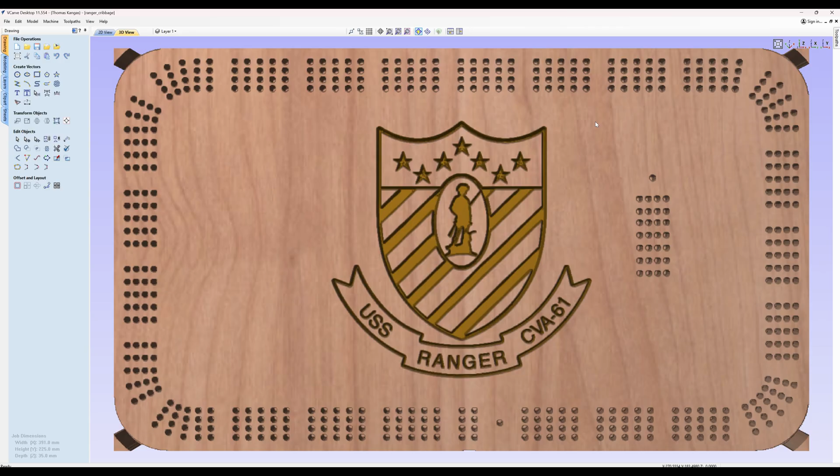For our project, we're going to start by creating a new file, and for the size plug that I already have cut for this, I have a width of 391 millimeters, a height of 225 millimeters, and a thickness of 35 millimeters. I always like to go from the lower left-hand corner, and I set my material to cherry because cherry is the wood that we're going to be using today. So we'll start that off.

Next, we're going to import our vector, and I've already pre-designed this vector and made sure that it's cuttable on my CNC. If you saw my post on YouTube, you saw that I had posted a picture of the results of that. So we're going to open that up. We're going to press F9 to center that. And now we're going to start creating our vectors to determine the size of the board.

Our first vector we're going to create is going to be the size of our workspace, 391 millimeters wide by 225 millimeters high. I'm going to give it a 30 millimeter radius so that it has nice round corners. We're going to create that vector, close that off, highlight the vector, press F9 to center that.

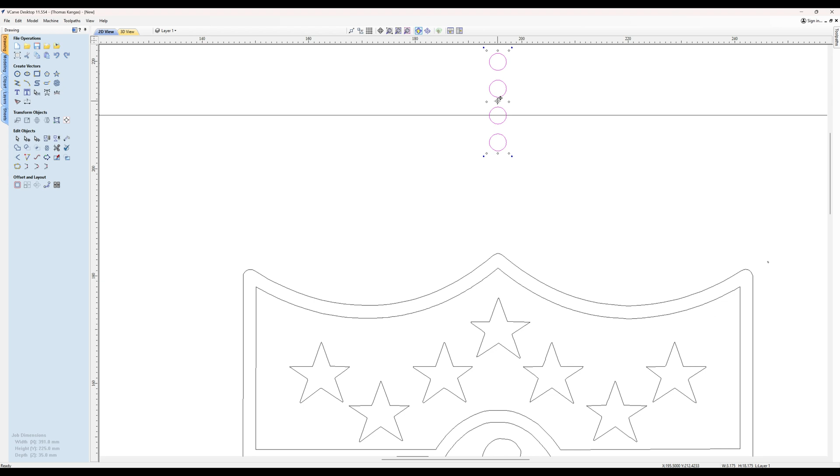Close that out. Once we're done there, we're going to highlight our 4 peg holes. We're going to come over here and group them. We need to group them so that they'll copy properly along the vector when we decide to make the holes. So now that they're grouped, I'll highlight, double click, and we want to move those to where they line up centered on that interior vector.

Okay, so now that we've got our initial set of holes laid out, we are going to highlight that interior vector along with the 4 holes. You do that by holding the shift key and clicking the interior vector. Then we're going to do copy along vectors and create 150 copies aligning the objects to the curve. Make sure you select align objects to the curve so that they go around the curves of the vector.

So we'll go ahead and say copy, and when our copy is complete we can click on close, and now we no longer need that original set of peg holes. So what we will do is we will leave those highlighted, press the delete key, and now they're gone.

The next step in the process is going to be to put a little bit of spacing between our pegs, so we have our starting position, our stop position, and can clearly identify our scoring. We usually break these up into groups of 5. Alright, so I'm going to start by deleting this group of 4 pegs under the E in Ranger. I'm going to move over 2 to the left for my start position.

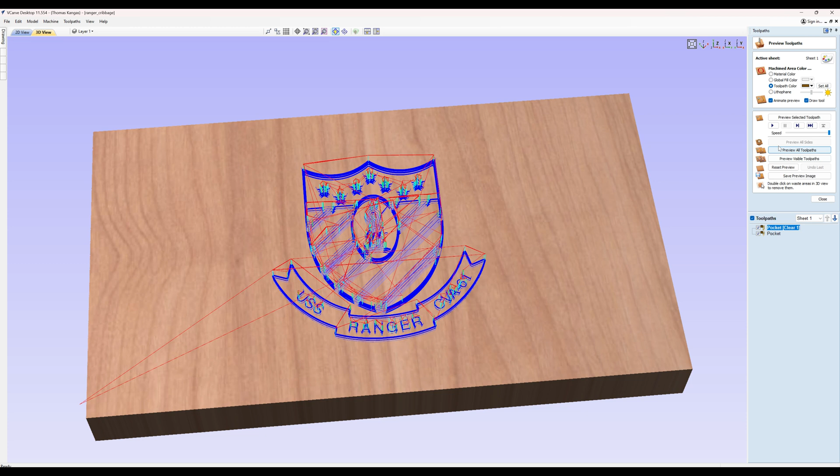I'm going to change the colors to something somewhat similar to a walnut color. Let's see if we can get something closer to a brown. And set the same color for our pocket, and we will preview the toolpaths. Alright, so there we have our pocket side of the V-Carve inlay.

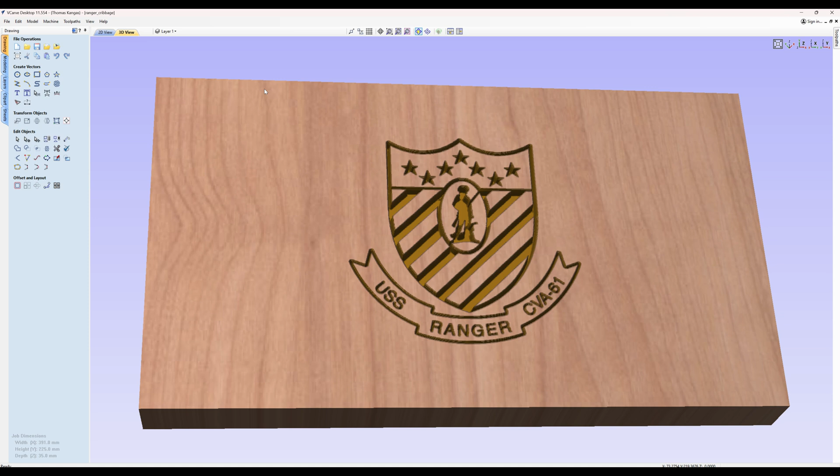Now that we've completed the pocket side of the inlay, we're going to do the plug side of our inlay. So for that, we need to switch over to sheet number 2 and then go over to our toolpaths. We're going to select everything, and we're going to do another V-Carve toolpath. Now with this, we're going to do a start depth of 7.5 and a flat depth of 1.5.

What this is going to do is give us about a 1.5 millimeter glue gap and gap above the board, which we'll be using the CNC to remove later in the process. So something to keep in mind is that with the hobby CNCs, we can't go to this depth. Looking at this toolpath, the CNC will assume that our start depth is already cleared material, and it'll plunge all the way down to 9 millimeters. We don't want to do that. So we're going to make this our third toolpath, actually.

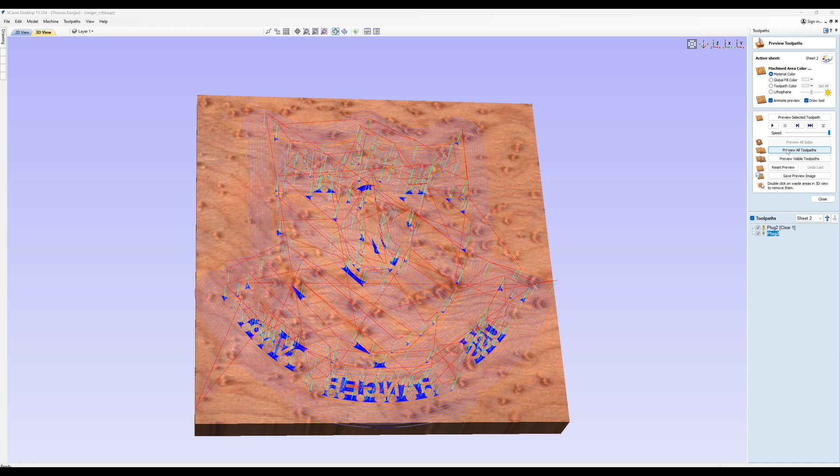So we're going to call this plug 2. And we'll calculate that all out. And then if we actually run it, that'll be our full depth. But we're not going to do that full depth on one particular toolpath because obviously we would crash our bit, probably break it, and possibly damage our CNC.

So we'll reset that preview, go back over to our 2D toolpath, close that, and now we're going to create a second toolpath called plug, and we're going to set that one at 4.5 with a flat depth of 1.5. This will give us a basic depth of about 6 millimeters. We're going to call this plug number 1. Calculate that out.

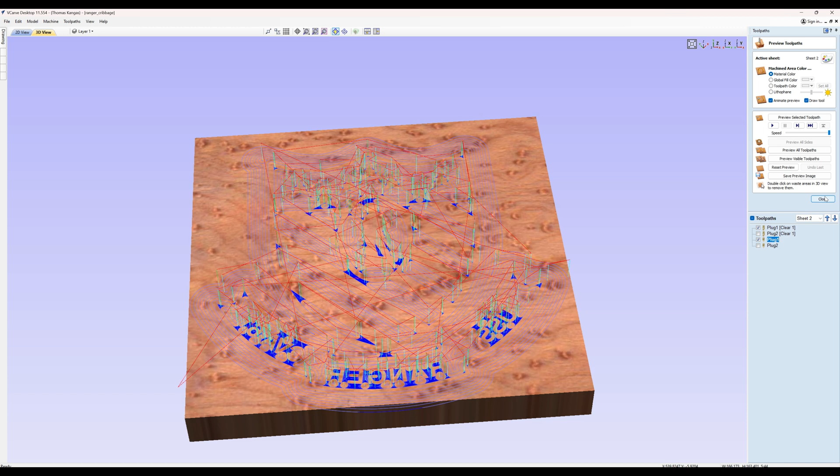And then we're going to drag it above our plug 2 settings. And we'll go ahead and close that out. And then we'll make our main plug, which is going to be starting off at 2 millimeters in depth and going down to a flat depth of 1.5. This will give us a total depth of 3.5 millimeters, and this will be our first pass.

So we're just going to call that one plug and calculate that out. Move plug up above plug 1 and plug 2.

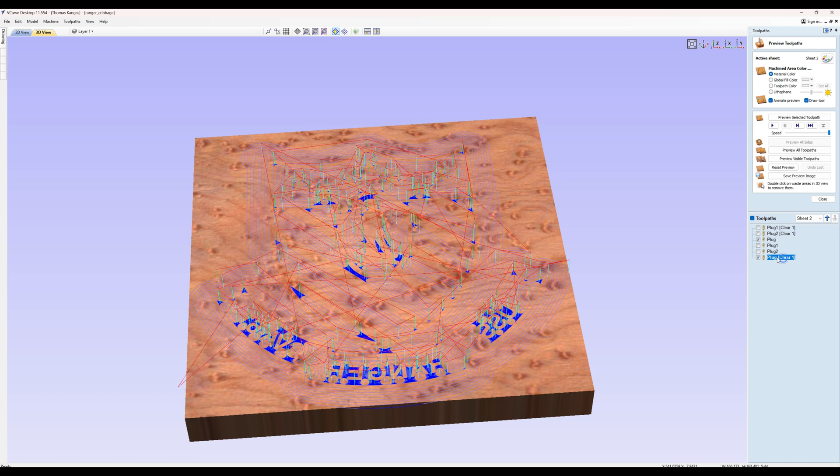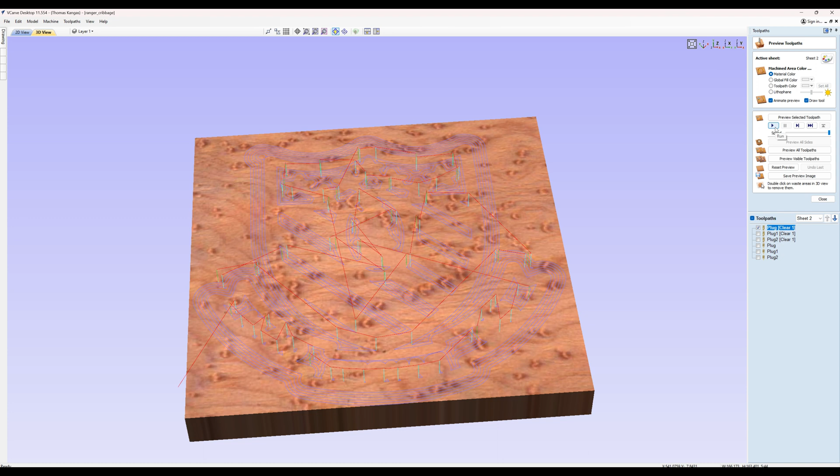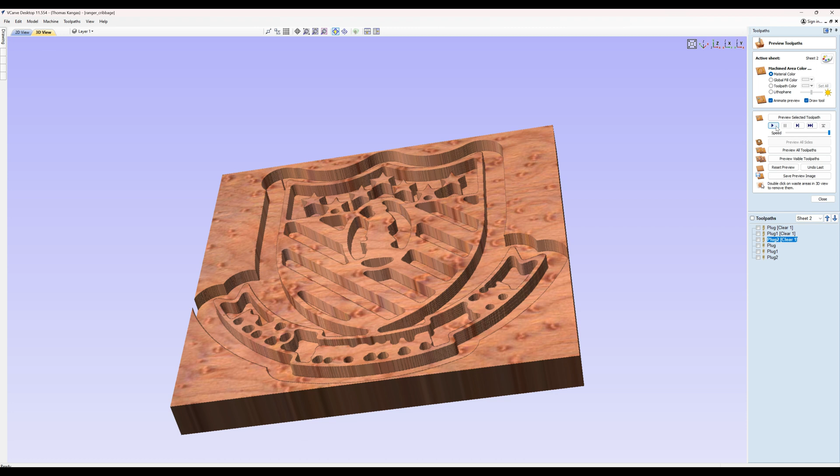And now if we do these tool paths in order, and it's important to do them in order because when we group these and export them later, they will execute in the order we have them. But we're going to start with plug clear, and you see that goes just about 3.5 millimeters in. Then if we run plug 1, it's going to take us down to our depth of 6 millimeters. Then finally plug 2 is going to take us all the way down to our 9 millimeter depth.

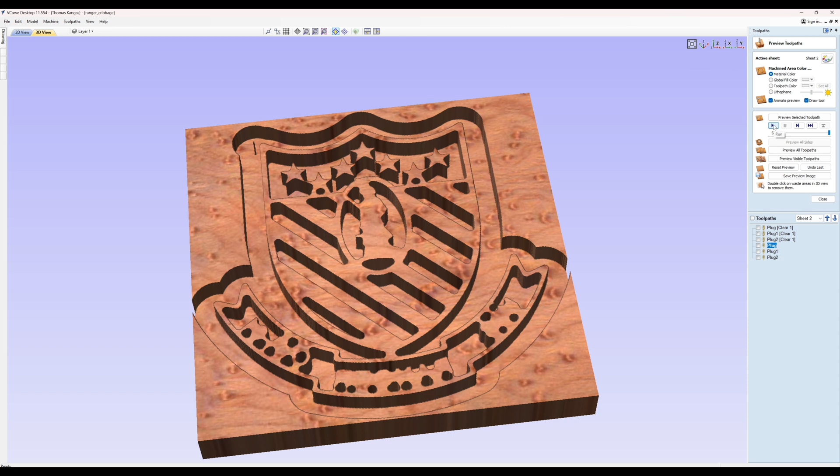Now this is just the 1/8 inch end mill at this point. After that we'll do a tool change, and we'll start with plug with our V-Carve, and as we see, it'll do a pass. Execute plug 1, takes it down, and then plug 2 will complete out our entire plug side. We will, with the bandsaw, clear off the excess material so that we can glue this up.

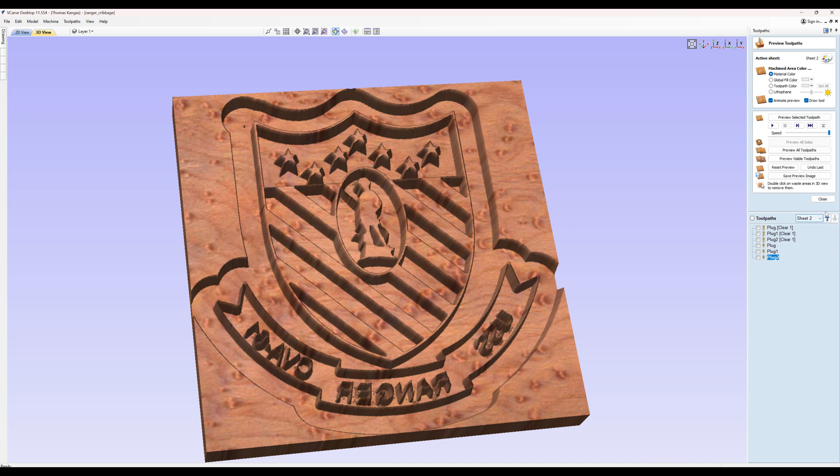So now we can go ahead and close that out. Switch back over to our file operations and our 2D toolpath, and go back to sheet number 1. Next, we're going to need to do our toolpaths for our cribbage board peg holes. So for that, we are going to use a drilling path. But we need to start by selecting all of our peg holes.

Okay, now once we've got our peg holes selected, we'll go over to our tool paths. We're going to do a drilling tool path. For the drilling tool path, we're going to go down to a cut depth of 12.7 millimeters using a 1/8 inch or a 3.175 millimeter end mill. We will use peck drilling and retract above the cutting start depth. Our retract gap will be 0 millimeters and our peck depth will be 2 millimeters.

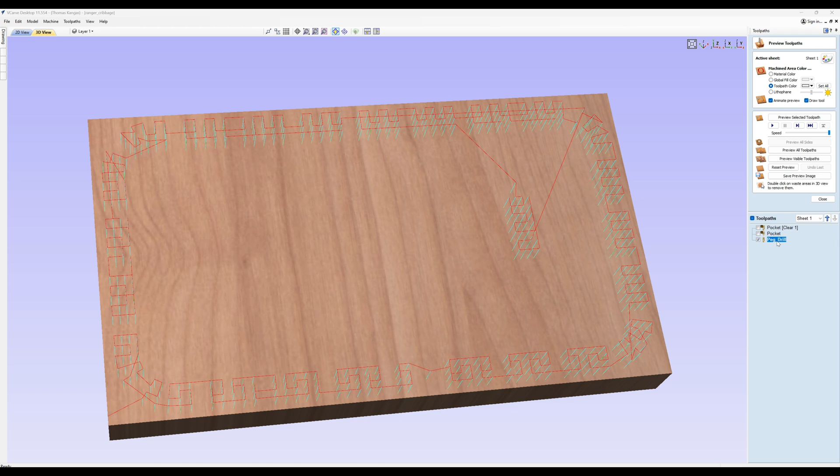Now if we select all three of our tool paths and click preview, we'll see we have our board and all of our peg holes now cut. So we'll go ahead and close the toolpath preview, move back over, switch to our 2D tab, and we have one more toolpath that we need to create right now, and that is our profile toolpath. For our profile toolpath, we're going to highlight that outside vector, and we're going to do a profile toolpath.

Now for our profile, I plan on using the bandsaw to cut around these edges. So we're going to give a path for us to follow. Instead of going the entire 35 millimeters in depth, which is difficult to do because I only have about 4 inches of play in the Z-axis to begin with, what we will do instead is we'll go down about, we'll say 25 millimeters, which is around 1 inch.

For our tool, we're going to use a 1/4 inch end mill. And we're going to set that at about 18 inches per minute and a plunge rate of 9. And our pass depth will be about one-eighth of an inch. We'll go ahead and select that. And we're going to make sure that our vector is along the outside. And we'll call this profile. Calculate that out.

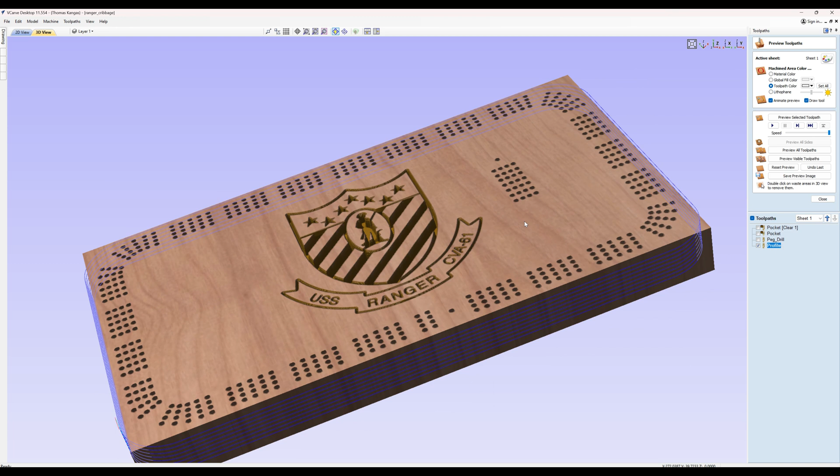And now, as we see, we'll go most of the way through the board, but not all the way through the board. We execute that toolpath. We'll have a little bit that we can take off with our bandsaw, and then we'll clean it up with the palm router afterwards to keep those edges. So that wraps up part 1 of our 2-part build video for this cribbage board.